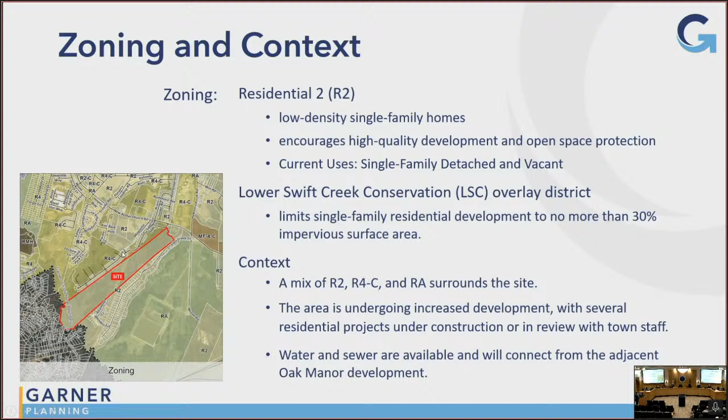There's a neighborhood activity center to the northeast where they're building the roundabout at Ackerman, White Oak, and Hebron Church Road. There's also a neighborhood activity center to the west on Benson Road. This area of the community consists of a mix of vacant tracts, single-family neighborhoods, and some of our remaining agricultural tracts. Since 2015, this area has been transitioning from low-density rural agriculture to suburban developments and suburban densities.

The proposal is a Residential 8, R8 conditional. They're narrowing their request to 1 out of 18 possible uses, only single-family detached homes. Collectively, they're proposing a maximum of 322 dwelling units: 206 at 45 feet wide by 120 feet deep, down from their first proposal of 236; 104 at 52 feet wide, down from 122; and 12 new 80-foot wide lots. Their total unit count of 322 is at 2.32 dwelling units per acre, down from 328 units and 2.37 per acre.

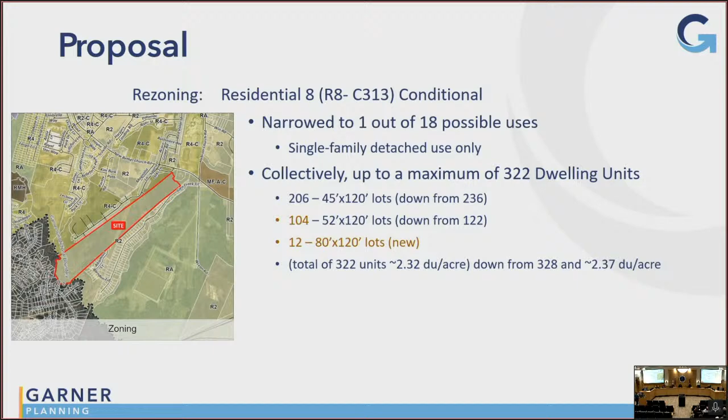Going down their list of conditions, they're proposing no more than 2.5 dwelling units per acre, and a minimum 1-acre neighborhood recreation amenity area with a pavilion, fire pits, outdoor gathering space, and a minimum of 500 square feet covered. These elements of the neighborhood recreation amenity center shall be completed prior to the issuance of the 150th CO.

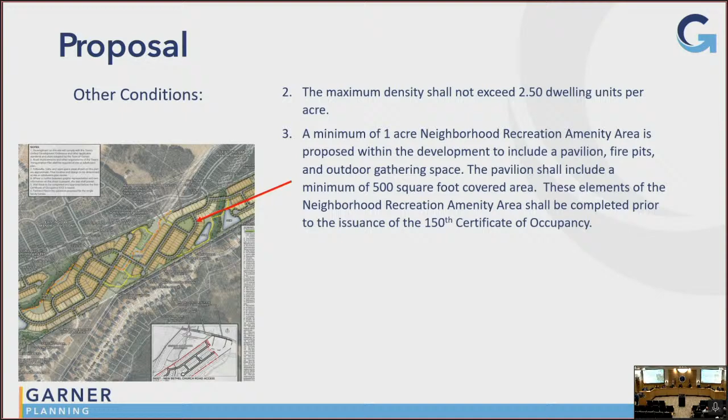They're proposing a minimum of 3.5 acres of common greens, pocket parks, and playgrounds, spread throughout the neighborhood. Improvements to each area will include at least 2 of the following elements: play lawns, tot lots, picnic tables, dog parks, fire pits, etc. Play lawns would be a minimum of 1/4 acre each grassy area. At least 1 active open space shall include a playground.

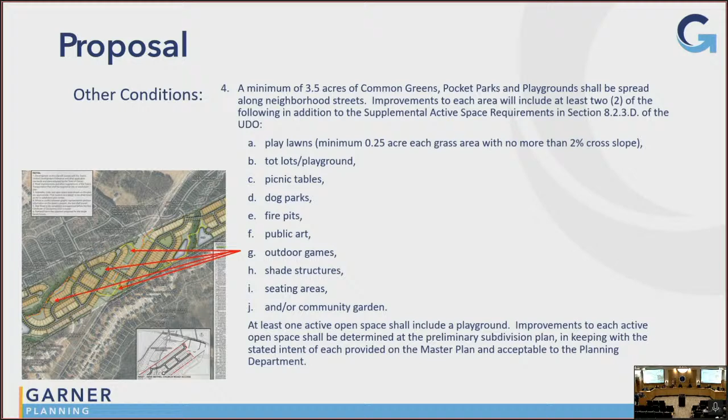Improvements to each active open space shall be determined at the preliminary subdivision plan, in keeping with the stated intent of each as provided on the master plan and acceptable to the Planning Department. They're proposing a covered mail kiosk with required parking, located closer to New Bethel Church Road in their common green area.

The development shall include 45% HOA owned and maintained property, which includes active open space, passive open space, and common areas. Those areas can include tree preservation, riparian buffers, floodplains, stormwater control measures, and active and passive amenities.

They have proposed a network of paved private and public greenway trails to help create links between all their open spaces, with a minimum of 5,000 linear feet of private and public trails. On the master plan, in the staff report as well as the paper copies given to you today, they're demonstrated in yellow and orange respectively, private and public trails. The final locations will be determined at subdivision plan review.

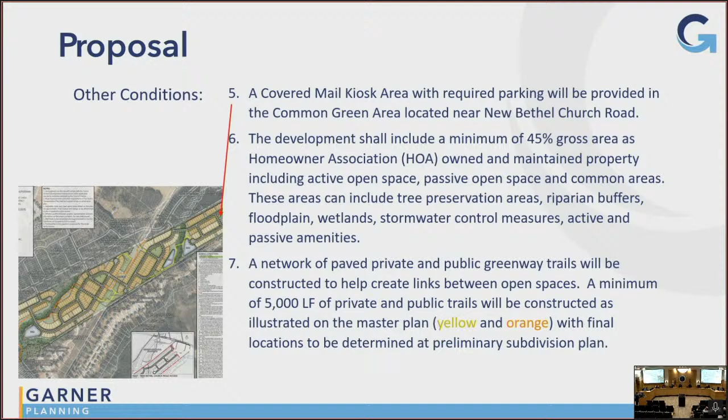All the homes will have 2 or more finishes on the front—lap siding, masonry, shakes, board and batten are examples. The materials will be cementitious: lap siding, board and batten, shake and shingle, that fiber cement material. Although they are proposing vinyl windows, shutters, PVC, solid trim boards with their decorative elements and corners.

They are proposing a minimum 12-inch grade separation from the average grade along the home's facade, and the exposed foundations will be clad in masonry or stone veneer at the front and side elevations visible from the right-of-way.

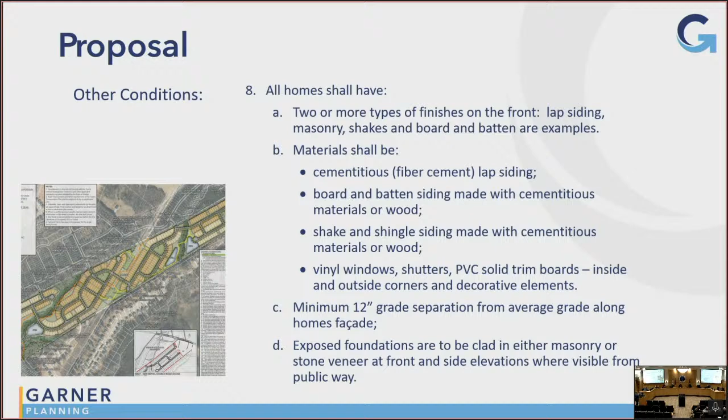All the homes will have 2-car garages, minimum of 20 by 20 feet, 1,500 square feet, 8-inch minimum eaves on front, rear, sides, and 4-inch minimum eaves and rakes for secondary roofs. Gutters do not count towards the requirement in the minimum eave.

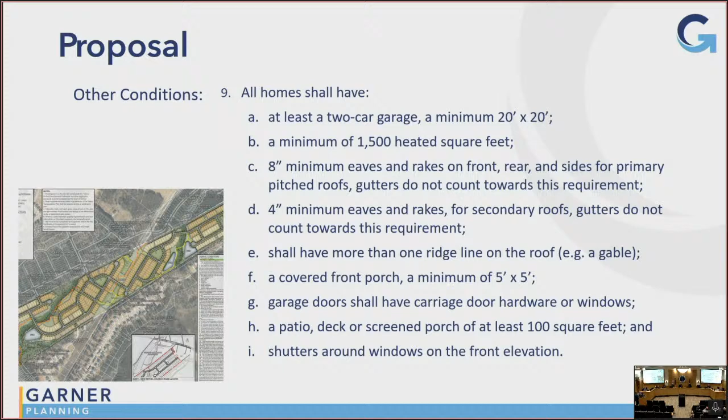They shall have more than one ridge line of the roof, a covered front porch minimum of 5 by 5 feet. Garage doors shall have carriage door hardware or windows, a patio deck, screen porch of at least 100 square feet, and shutters around windows on the front elevation.

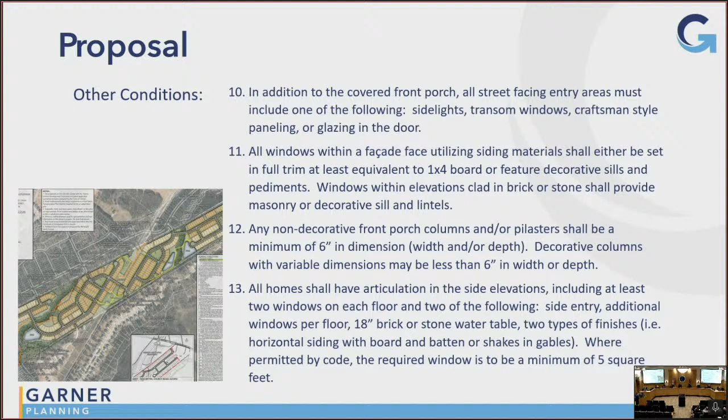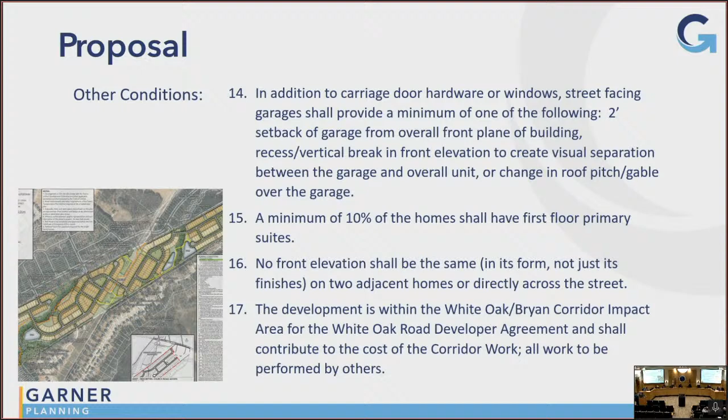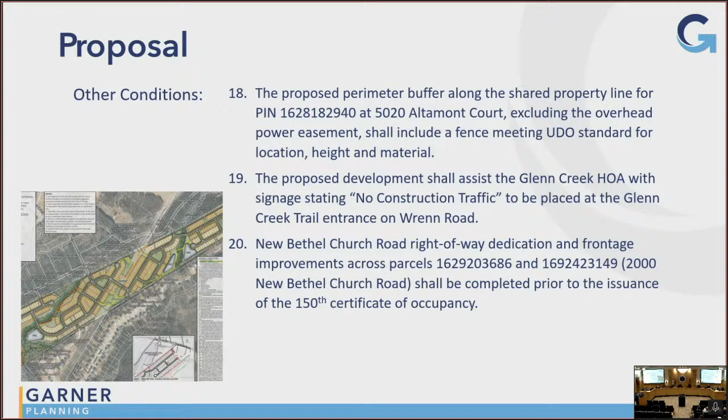They did propose 2 new conditions since it went to public hearing. I'm going to read them—I'm sure they're going to explain better if you have questions.

They are proposing a minimum of 10 residential restricted medium income affordable housing units. They will be constructed on site, sold, and based on an 80% AMI for the Raleigh metropolitan statistical area.

There will be a restricted covenant. They'll be deed restricted against each affordable housing unit concurrently at the close of escrow upon the sale of the home.

Prior to recording the plat for the final lots, the developer will submit documentation about this zoning condition. The floor plan and selection of unit size and bedroom size will be at the discretion of the developer.

In respect to location, no more than 2 affordable housing units shall be permitted on any individual street, so they'll be spacing that out throughout the neighborhood.

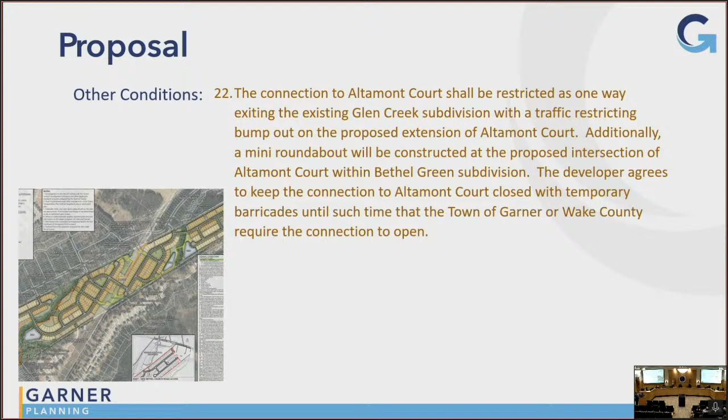This is a picture of the entire master plan. I know you have a couple paper copies, a much larger one that you can see.

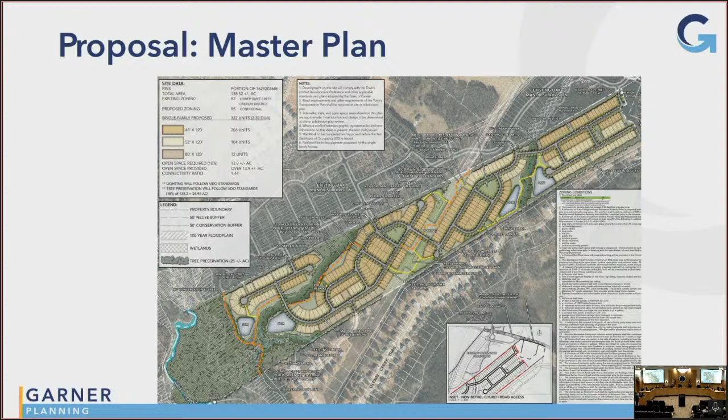Overall, the proposal is 138.52 acres of R8 conditional. The lot count is 206 at 45-foot width, 104 at 52-foot width, and 12 at 80-foot wide lots. That's 322 units total, at 2.32 dwelling units per acre.

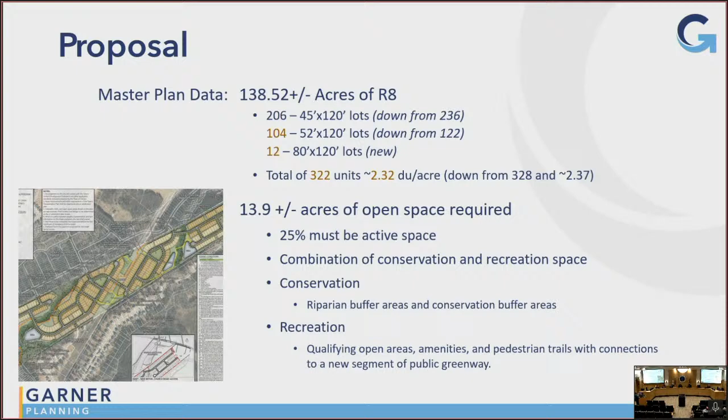Their master plan includes 13.9 acres of required open space, with 25% required to be active space. There's a combination of conservation and recreation space. Conservation includes riparian buffer areas and conservation buffer areas. Recreation includes qualifying open areas, amenities, pedestrian trails, and a new segment of public greenway.

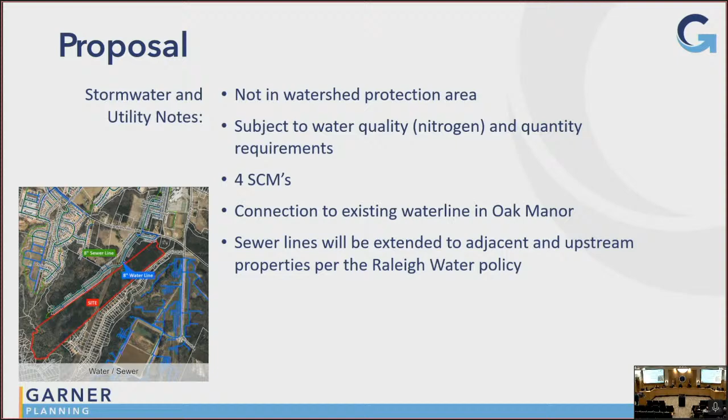This is not in a watershed protection area, but it is subject to water quality, nitrogen, and quantity requirements. Mr. Boylan noted they're proposing 4 SCMs, and they will be connecting to the existing water line in Oak Manor. The sewer lines will be extended to adjacent and upstream properties per Raleigh water policy.

Now Jeff is going to speak to a couple slides regarding transportation in the area. Thanks, Thomas.

As I'm sure you're all aware, this part of town has limited means of ingress and egress. Currently, that primarily happens from White Oak onto Hebron Church, with a short diversion onto Ackerman, though that will be redone with the roundabout. Ackerman will have its own intersection with the roundabout, and Hebron will as well. Of course, the other point of access is New Bethel Church Road at NC 50. You could also meander down Bryan Road from White Oak, and eventually we hope Ackerman will punch through and connect with 50 as well.

This did provide us with a pretty good case study, being able to look at existing traffic counts as they are today, coming through either Hebron or New Bethel. We wanted to test whether some of the assumptions from national organizations, like the Institute of Transportation Engineers, make sense for Garner, and I think what we found is that they do.

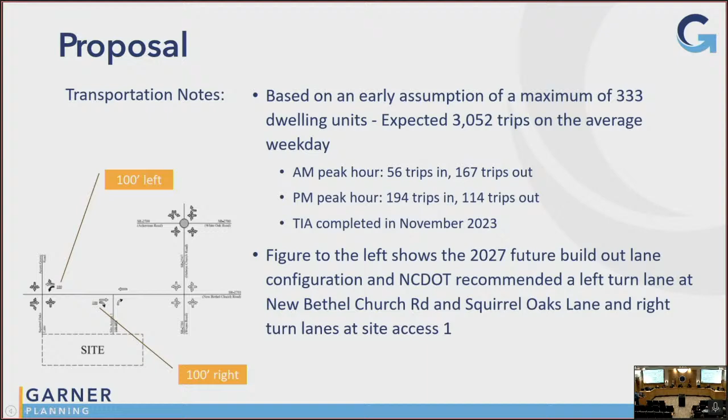The recommended improvements are on the main road coming in: a 100-foot dedicated left-hand turn lane at Squirrel Oaks Lane off of New Bethel. Then coming from New Bethel off of 50, there would also be a dedicated right turn lane, 100 feet, into the main site access point—again, just creating additional traffic turning capacity at the development itself.

Staff also looked at the adequacy of the future road network in the area. This was first done at a very high level in the previous version of the comprehensive plan—not this most recent Garner Forward Comprehensive Plan, but the version before that.

What the consultants found at that time was that we probably needed to keep densities a little lower in this area. They recommended anywhere from 2.5 to 5 dwelling units per acre, and even that was probably pushing it a little—but definitely not anything high density that would create a lot of trips for such a small area.

Generally, the Institute of Transportation Engineers says a single family home generates about 10 trips per day and a townhome generates about 7 trips per day. Since we just have townhomes and single family homes in this area, apart from the high school and elementary school, it felt like a good place to test those numbers out and see how they came out.

We did find that it was consistent with our locally available data. They actually might even be a little bit high. So if nothing else, we feel pretty confident that the trip generation rates that ITE recommends are suitable for Garner, and may actually be just a little bit aggressive, but we can always err on the side of caution.

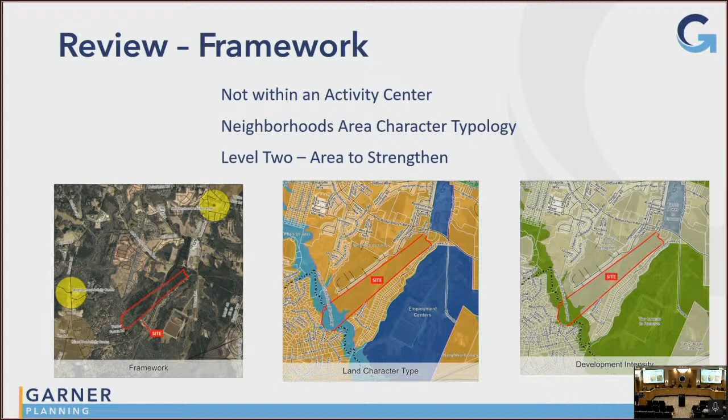Just some framework maps—again, not within an activity center. It's part of the neighborhood's area character typology, and it's a level 2 area to strengthen. For framework, there were 15 growth framework consistency criteria evaluated: 11 were rated strongly consistent, 2 modestly consistent, none split or modestly inconsistent, but there were 2 strongly inconsistent criteria. Those are all related to the recommended housing styles, lot sizes, and the relationship between them.

For land use and community character consistency, staff evaluated 26 applicable criteria. The transition to modest support is primarily attributed to an adjusted emphasis on the public realm—exploring the use of open space for creating a stronger central focal point to the neighborhood and stronger connectivity of the trail network—which now speaks more directly to specific recommendations of the comprehensive plan. So overall, although the needles can almost always be shifted towards higher levels of consistency, staff is able to support an overall finding of consistency for the request as revised. The full consistency review is attached to your staff report.

The public hearing was conducted on September 17th. There were a number of citizens that spoke in opposition to the project. Some summary discussion points: they expressed concern over the number of new subdivisions in the area, the capacity of the roads, and traffic. They expressed concern over the R8 zoning district not being met. There were concerns over the proposed side setbacks. There were questions over master-down products, if they'd be included to address senior living. There were questions about an affordable housing component, which was added. There were commendations for the developer working with the town to draft conditions, limit proposed uses, and create pedestrian connectivity. There are also concerns over local school capacity.

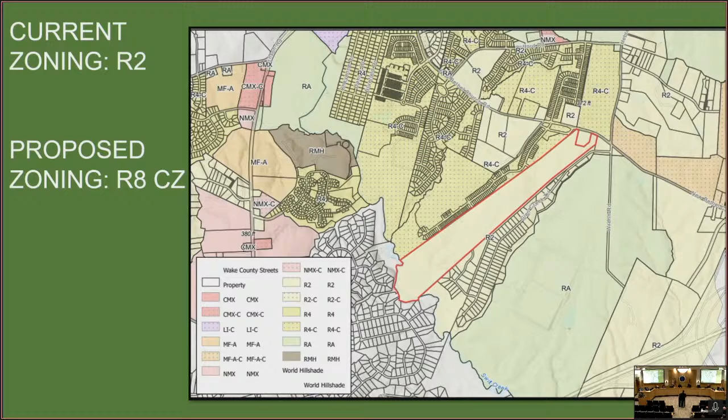But overall, we believe it's an appropriate density. It's consistent with the comprehensive plan's land use recommendations, and it's going to provide what we believe to be an effective transition from the community to the north to the community to the south.

In addition to the land use recommendations, as you're all aware, the comprehensive plan also speaks to community character. Kurt, Beth, and the entire team have really spent a great amount of time working with Jeff and the staff to curate this plan in a way that will make it unique. I'm going to talk about why we believe community character is reflected very well in this proposal, and we agree with the staff's position regarding how the plan is consistent with those recommendations.

A couple other numbers we think are very important as they relate to the character of development you'll get here. The first is that 75% of the homes are within a 7-lot walk to a walking trail. So you won't have to walk 20 lots down the street to get to one of the trails that weaves in and out of the site. I'll talk about that in a minute.

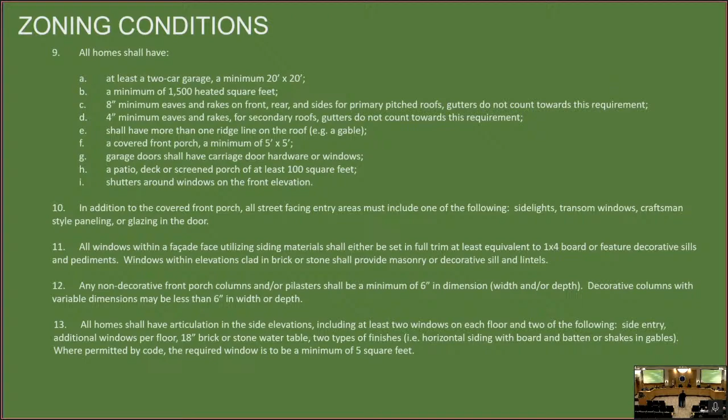Condition number 15 is that 10% condition I was speaking of. I do want to note that even though this property doesn't have frontage on New Bethel Church Road, my client has worked with the owners of that property to ensure the frontage improvements happen—let me go back to our master plan to highlight that. You can see it here. So the frontage improvements along New Bethel Church Road will be done with the development. Even though that portion of the site isn't part of the zoning proposal, they worked with the owners to get a commitment allowing this development team to make those critical transportation improvements along New Bethel Church Road, in an effort to do the right thing.

We've also incorporated conditions intentionally responsive to neighbor concerns. As you're aware, we had two neighborhood meetings. One thing we've agreed to do is propose a perimeter buffer—condition number 18 on your screen—along the shared property line with the PIN at 5020 Altamont Court, on the southern portion of our site, to include a fence meeting the UDO standard for location, height, and material.

Additionally, we've agreed to put in a sign that prohibits, or at least discourages, construction traffic from going through their neighborhood. We understand their sensitivity to that. However, since we added that condition, as you may be aware if you heard the public hearing, we actually tried to put a condition on the case—so Altamont Court comes in right here.

There was a concern raised at the public hearing by a couple of neighbors related to the number of homes that would be behind them. So we enlarged the lots to roughly 10,000 square feet along that boundary in an effort to provide a better quality of life for the people currently living there, as well as for those who will be living in our community.

Last, I want to point out that we've added a condition requiring 10 units at 80% AMI to be included as workforce housing units associated with this case. That's roughly 3% of the proposal. I'm seeing that in other places where I work—on the ownership side, 2.5% is typically the number you see for owner-occupied units. Additionally, as noted in condition 22, that's the one-way condition I've already discussed, and lastly, the increased lot size is something that changed since the public hearing.

The last point I'll make—Mr. Triesenberg did a fantastic job running through traffic. We're sensitive to traffic; we understand it's always everyone's concern, especially in an area like this. We believe we've been responsible from a density standpoint. We've studied the traffic, we're complying with the recommendations of our traffic study, and staff has done a great job taking it one step further with a capacity analysis, determining there's sufficient capacity to support this development as well as others that may come along. Ultimately, we believe this is the right use in the right location. We're excited to be here, happy to answer any questions, and we would respectfully request your recommendation of approval of the case.

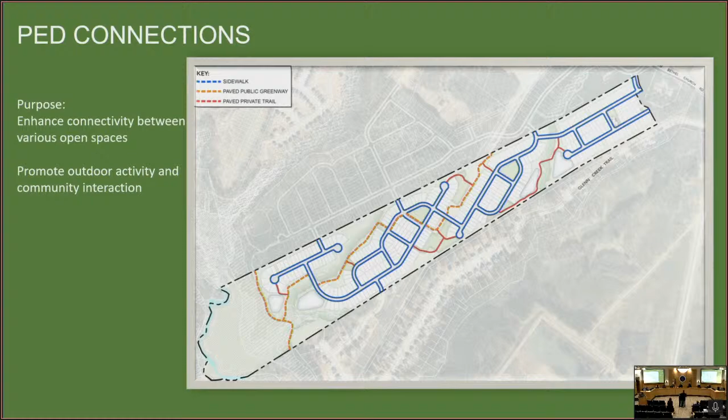But at this point, given how adjacent developments have built out, there's a greenway that's going to be lining the western edge of the property that will ultimately connect to the greater greenway system. But at this point, it's really kind of making connections to existing communities and then providing robust connections within the community itself. Got it, okay.

Yeah, I definitely like the trails and the greenways, similar to what they echoed down there. And then my other question is, so I noticed that there's a lot of green spaces. Are there any tennis courts, basketball courts, anything like that? Yeah.

Can you go to the one that has the open space? So we've shown conceptual exhibits of what the open space areas could show. In the main amenity area, we have commitments in our zoning conditions as far as what has to be there. But conceptually, we are showing, and in all of our conversations, have committed to 3 pickleball courts, covered shade areas. We also talked about bathrooms for that one amenity area. And then the others have more active but less structured play areas.

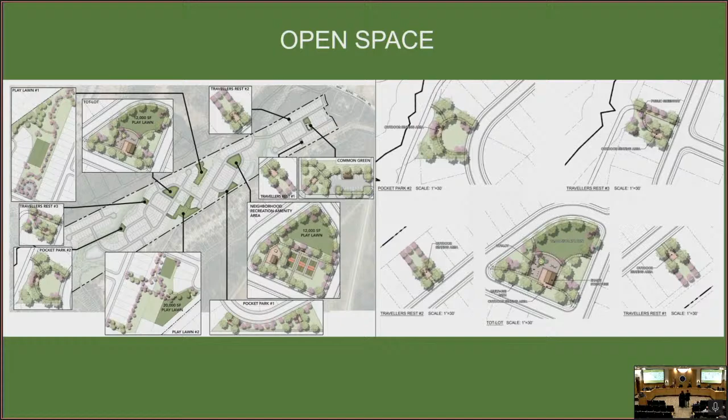Awesome, thank you. No problem. So, Ms. Bishop, you asked the question related to greenways, and Beth did a great job of being the planner on the gig and reminding me that the transmission line that runs through our site, our greenway, will connect through...

the community to the north that ultimately will connect out to the school. So there will be a greenway connection from our site to the school. Okay, thank you.

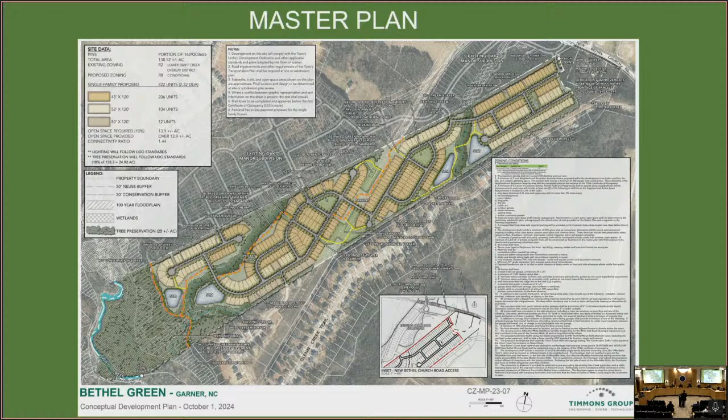So I didn't have any questions, but I did have a comment or a couple comments. I ditto what Mr. Voiland said about your use of this unique space. When I rode out to look at it the other day, like he said, with the power lines going through the middle of it, I was like, ooh, this is going to be interesting. So I commend you on how you have been able to develop it.

And I also commend you on having 3/4 of your homes within 7 lots of some type of exercise or green space or trail. I also like the fact that you've got 30 plus first floor masters, even non-senior people enjoy not having to run up and down stairs.

Absolutely. I also like the affordable housing unit component, like that component. And then the thing I think I like best is the fact that you did incorporate so many green spaces and play areas and recreation spaces, as opposed to just maximizing the utmost number of homes that you could into the development. In other words, maximizing your profit, sacrificing homes for profits. But I do appreciate the fact that you have a good layout here, and I just wanted to say that. Thank you. You're welcome.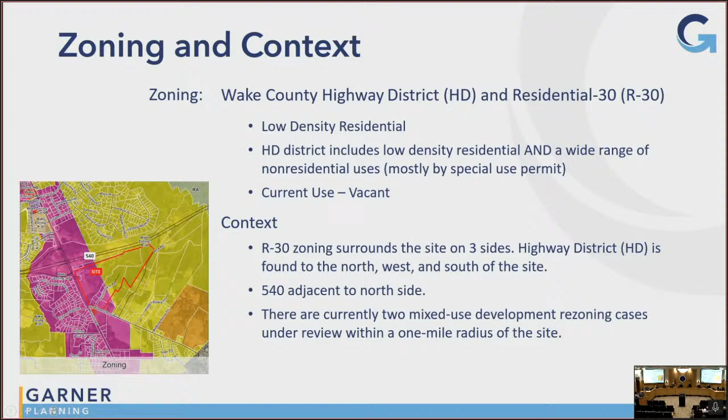The surrounding zoning districts of the site include R30, which surrounds the site on three sides, and Highway District to the north. So this is the R30, and then you have the Highway District. 540 is adjacent to the site as well, to the north. There are two mixed-use rezoning cases, one recently approved within a one mile radius of the site, and one currently under review with the town. This image on the screen gives you an idea of the area at large, as well as the site's location in proximity to the other cases.

This is CZ 2302, which was approved by council this month. And this is our Tier 2 master plan mixed-use development that is primarily residential and may have a commercial component as well, just west of the site.

This stretch of Benson Road is an arterial road, primarily 2 lanes, although there are some improvements due to the extension of the NC 540 project. Benson Road, or NC 50, connects Garner's Town Core on its north end and, to the south, the Community Activity Center at 10-10 Road. It further connects at 540, the Regional Employment Center, and then eventually on to NC 42. NCDOT's last reports show traffic counts at Benson Road in this section as 17,544 annual average daily trips, and at Cleveland School Road, 9,549 AADT. This data was obtained in 2023.

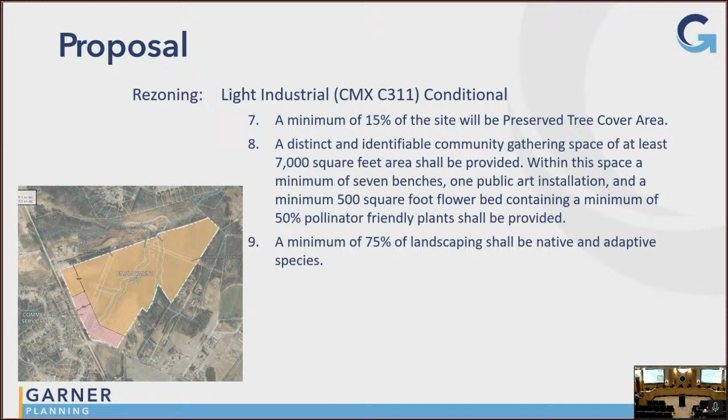The applicant has also committed to architectural standards, such as building materials, entranceway, covered awnings, and outdoor spaces, furthering the size of those outdoor spaces.

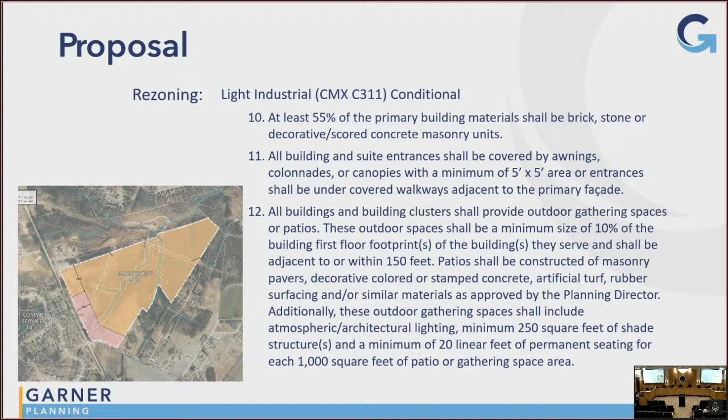You have an area map that again shows Exhibit B, the employment pod, as well as the commercial services pod area.

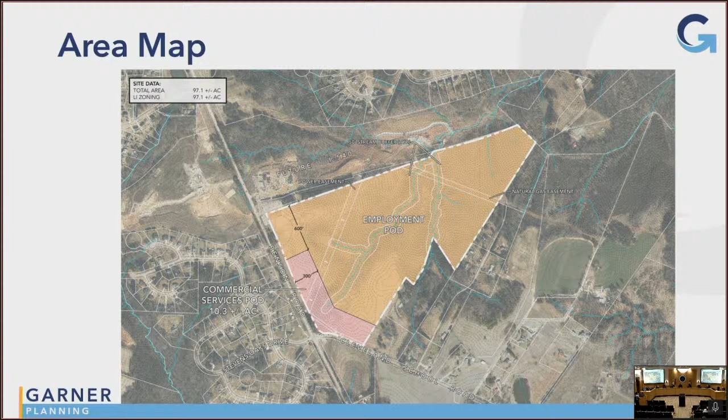Regarding transportation, the expected trips generated is 2,493 average daily trips. This is actually a 50% increase to allow flexibility for the ultimate uses that may be developed at this site. It is expected to generate 275 trips in and 90 trips out during the AM peak hours, and 200 trips in and 252 trips out during the PM peak hours.

There were two access scenarios that were studied, but one was ultimately ruled out by the Turnpike Authority.

You have an image of the future lane configuration, build-out configuration. I'll highlight it on the screen and briefly go through those. On Cleveland School Road, there is a dedicated right turn lane with 100 feet of storage, and a dedicated left turn lane with 200 feet of storage onto Cleveland School Road. There's also from NC 50, a dedicated right lane with 50 feet of storage, and a left lane with 350 feet of storage.

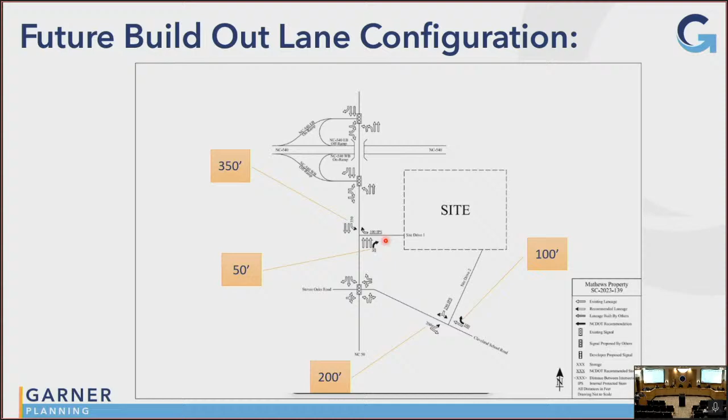So this choice of zoning district of LI is particularly supportive of the recommendations within sub-area 1. Even further, this site was identified as a high priority site within the Garner Industrial Growth Study commissioned in 2022 by the Garner Economic Development Corporation, and also identified as a top Garner site in the county in the 2023 Wake County Economic Development Site Identification Study.